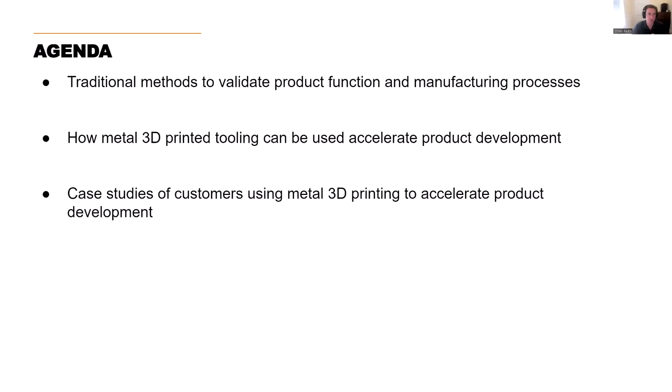So when we talk about product development process, generally we see it in two different ways. In the beginning, certainly during that design stage and some of the very early prototyping stages, it moves very, very quickly. Through modern CAD and simulation and assembly processes, as well as plastic 3D printing, you're able to come up with new designs and actually see those designs in a couple of hours, allowing you to move very quickly through those early design stages and get you to a product that you feel pretty comfortable with, a product that you like, and that maybe you're ready to move on to the next stage of the product development process and actually start to validate not just the design of the part, but the actual function of the part.

That's generally where we see things start to really slow down. When you actually need to validate the function of the component and not just the design that you're able to do in CAD and 3D printing. At this stage, generally, you need these end-use materials. You need the actual material that's going to be used for that part, which generally is not available with plastic 3D printing. And then also you want to start to look at the production representative manufacturing process because, of course, a plastic 3D printed part is going to perform very differently to an injection molded part or a machined component.

We find that this is especially challenging for some of the more highly regulated industries. And when you're using some of these highly engineered resins, like a PEEK or a glass filled material, working in these industries like medical device, auto, aero, food and beverage, et cetera, that require you to do some trials and product validation, this kind of process validation and the validation of the function of your part is especially slow and challenging when those criteria are involved.

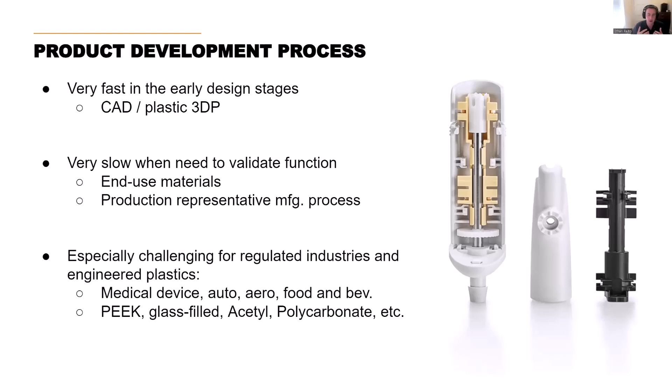So this is kind of another way of looking at what we were just talking about. And then, of course, we'll talk about what this process looks like with metal 3D printing. In the beginning, you're working in CAD, you're moving very fast. You're designing very quickly. You're assembling, you're simulating, you're doing interference detection to make sure that everything's fitting together. In that same day, you could have a plastic part in your hands to make sure that the form and fit is correct. But of course, at this stage, that material representation is pretty terrible.

I've never really found a plastic material that someone has told me is an exact representation of a molded ABS or a molded polycarbonate or some material that you're actually going to go to production with. Those parts are generally not usable for certification if you do need to do any level of certification, and they're doing nothing to validate your actual manufacturing process. So you're learning nothing at that stage about what that part's going to do and how it's going to be made at the end of the process. But of course, you're going to do some cycles in this stage, get to a design that you like. This could take days, weeks, months, years, depending on what the product is.

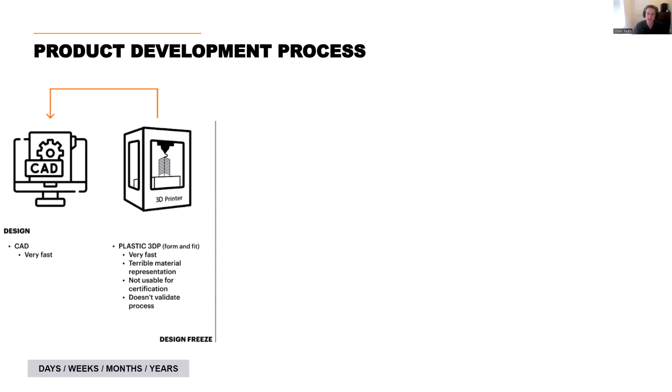But this part of the stage is pretty well developed and works pretty well. After that, of course, now we need to start looking at how we're going to validate the function of the component. You have a couple of different options here that we hear.

You could go with machining. You could machine your plastic part depending on what that application is and what the part looks like. Generally, that can be very fast. You can have a part in a day or two, depending on the lead times of your tools, of your machine shops. It's not going to be a perfect material representation because it wasn't processed in the same way as the final injection molded part was.

We especially hear that being the case with things like glass filled components where you may be cutting fibers with your cutting tools, as well as the flowability of those fibers may be different. So you're not getting a perfect material representation, but much better than plastic 3D printing. Those parts are not going to be usable for certification because they had a different manufacturing process, and you're doing nothing to validate your actual manufacturing process at this stage.

You could do something like a prototype tool, an aluminum tool. It's a bit slower than machining, but you are getting a much better material representation because it was a molding process. Those parts are still generally not usable for certification, depending on the industry, because it was made out of an aluminum tool, and you're not doing much to validate the actual end-use material, end-use manufacturing process. But you are able to validate some of the actual moldability of the part and the function of the part at that stage as well.

We also hear a lot of people using prototype services, something like a Protolabs or a Xometry, to get your molded parts very, very quickly, a week or two, which is great. Again, a better material representation, but generally not usable for certification, and it's not validating your actual end use material process. So this is generally looking at weeks and months.

After you're kind of locked in on your function, you're happy with your part design and the function of the material. Now we need to actually move to validating the manufacturing process and the end use process, and we're moving into our steel tooling stage. Again, this is going to be now very, very slow because we're waiting for steel tools, which generally have much, much longer lead times than something like an aluminum tool or a machined part or a prototyping service.

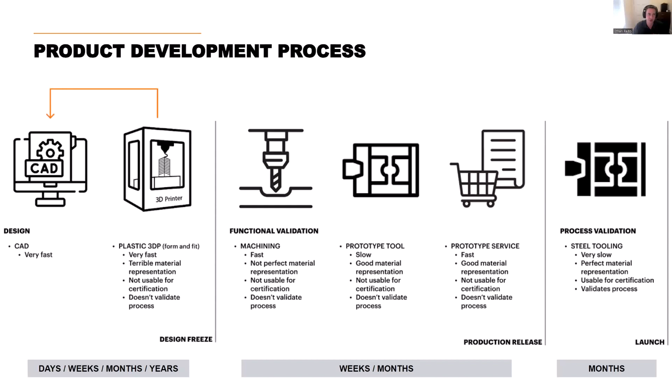But you're going to get that perfect material representation. It's going to be usable for that certification. It's going to be usable for verification, and you're doing a lot to validate the process here because you're using tools that are going to be an exact representation of what you're actually going to end up going to production with. So generally that process is looking like months.

Wouldn't it be great if you could use those steel tools and get all those benefits we just talked about, them being perfect material representations, being usable for certification, allowing you to validate your actual end use manufacturing process far, far earlier, maybe even right after you're doing plastic 3D printing. You'd be able to validate that manufacturing process, validate that the mold is functioning. You're able to actually optimize your molding parameters as well, things like temperatures, pressures, cooling rates, shrink rates.

You're doing some dimensional analysis on your part as well after this process because you're using your end-use tooling material, so you're able to learn a lot more about the dimensions. And then, of course, you're just de-risking all of production at this stage because you're actually using something that's much, much more similar to what you're going to go to volume production with. So wouldn't it be great if everyone just used steel tooling much, much earlier on in the process?

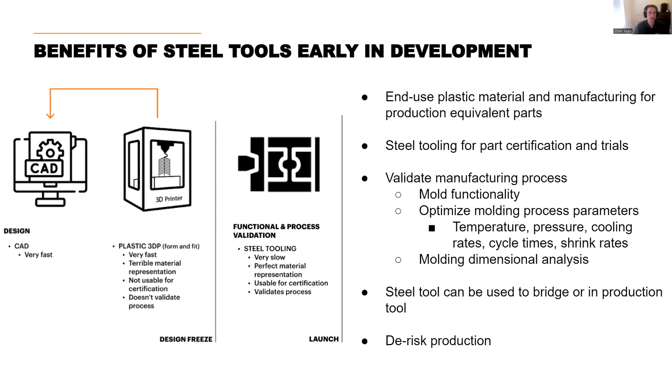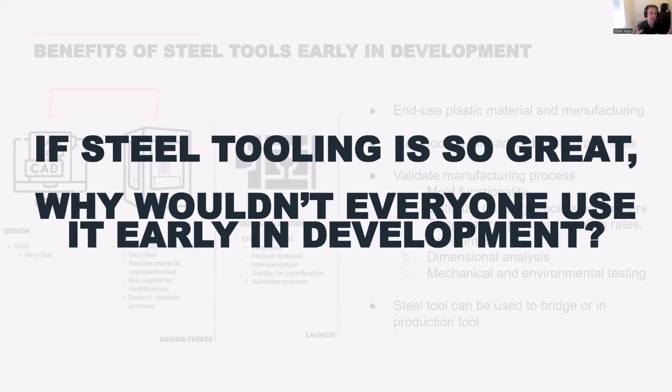But if this is so great, why do people not do this? Why are people not using steel tools immediately after their plastic 3D printing? Why do they do these prototyping services and things like that? Of course, as I'm sure many of you know that have worked with tooling before, there's a lot of challenges associated with steel tooling. Very long lead times. We're always hearing 12 weeks, 6 months, even longer to get steel tools, just because of how difficult they are to process and how specialized the skill set is to do that.

Expensive, tens to hundreds of thousands of dollars to produce these tools, that if you're not exactly honed in on your design and you're not sure that this is the right tool to build, you're not going to want to spend that money to build a tool that's not going to be able to be used for production.

Generally very, very hard to produce in-house when we talk to OEMs. It's not easy to start building steel tools. You need a lot of highly skilled labor. It's going to take years to train tool makers and bring on tool makers. And you need a lot of high CapEx equipment, milling equipment, EDM equipment, grinding equipment to actually start building these tools in-house. So all of these challenges involved have made it relatively rare to use steel tooling during product development unless very, very necessary.

And we'll look at some of those situations where it is necessary and what those lead times look like, especially when you're using those highly engineered resins or you're in one of those highly regulated industries like medical device or something where you need to be using a production representative tool.

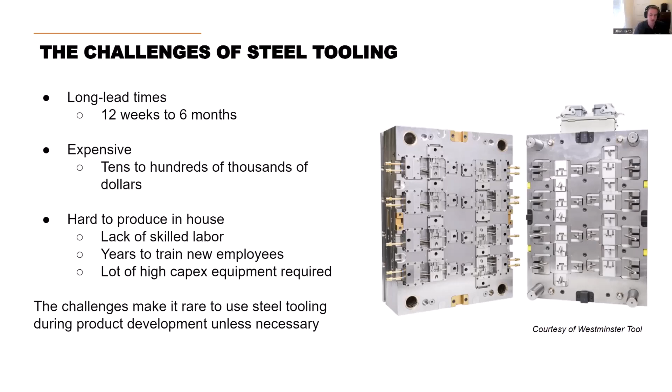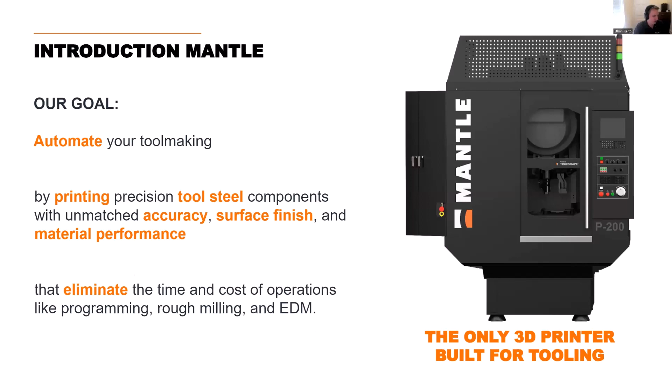This is where I'm going to introduce Mantle. If you're familiar with us, our goal at Mantle is to automate your tool making process. We do that by printing precision tool steel components with unmatched accuracy, surface finish, and material performance that are going to eliminate the time and cost of operations like programming, rough milling, and EDM that are generally required with tool building. We love to say that we are the only 3D printer that's built specifically for tool making. It's the only application we do. All we do all day long is print tools.

So where Mantle fits into this equation is Mantle can produce steel tools in that functional and process validation stage. We can do that at the same or similar speed to what you can do with prototype tooling or some of those prototype services. You're going to get a similar cost to a prototype, so you're not adding a lot of cost, but you're getting that perfect material representation. The parts are usable for certification, and we're able to validate that process as well.

So being able to use steel tools much, much earlier on because you're printing those tools in H13 tool steel or P20 tool steel or 420 stainless steel, which is going to be the same material as your end-use tool, in less time and less cost. So it can allow you to move that entire steel tooling process much earlier into the development stage to actually prototype or develop your part in a steel tool, which leads to a lot of different learnings that we'll explore throughout the rest of this webinar.

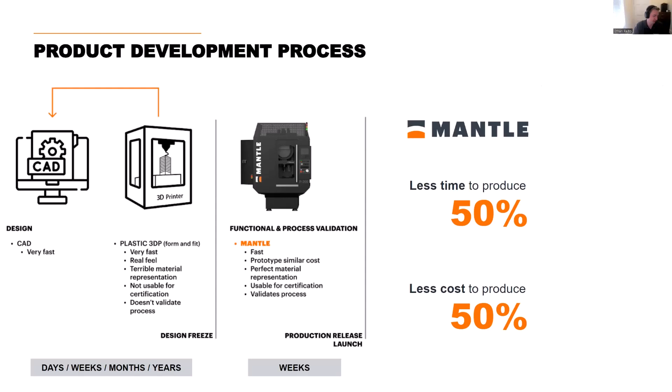Today we have two tool steels available. A P20 material, which we actually call P2X. It's very, very similar to a P20 material. It actually has superior corrosion resistance and comes out of our process with a 32 HRC. And then we have an H13 tool steel, which is actually our more popular material. It comes out of the furnace at a 42 HRC and can be heat treated all the way up into the 50s.

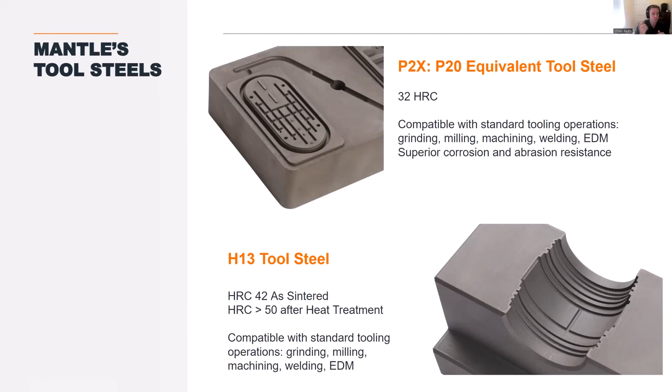Both of these, I should note, are fully compatible with traditional finishing, because we like to say our process gets you anywhere from 50 to 75 to 95% of the way there. Generally, tools need a little bit of grinding or wire EDM for ejector pins and things like that just to touch them up.

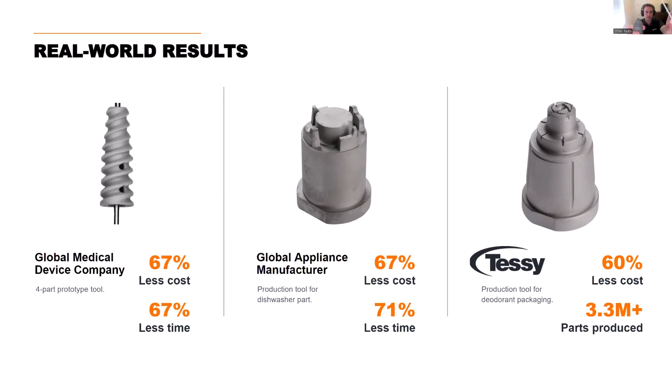Of course, we're going to look at a bunch of different case studies today. These are just a couple of my favorites that we won't go too in depth about today. From a global medical device company, a prototype tool, 67% less cost, 67% less time. A global appliance manufacturer, a dishwasher component, 67% less cost, 71% less time. And our favorite durability case study is from Tessy Plastics, 60% less cost and over 3.3 million cycles on these deodorant components.

The first case study we're going to look at of a company that's using metal 3D printing to help them accelerate product development is this prototype tool for this large medical device OEM, which unfortunately we can't disclose, but we can talk about this application that they're doing with their printer.

They had a new product they were bringing to market that they needed to mold some parts in acetal and Radel. Both of those materials would require them to use steel tooling. So very, very early on, they acknowledged, okay, when we want to go validate the function of these components and we want to actually validate our process here as well, we're going to need steel tools, which of course leads to a lot of cost and a lot of lead time. So they're always looking for a better way to do that.

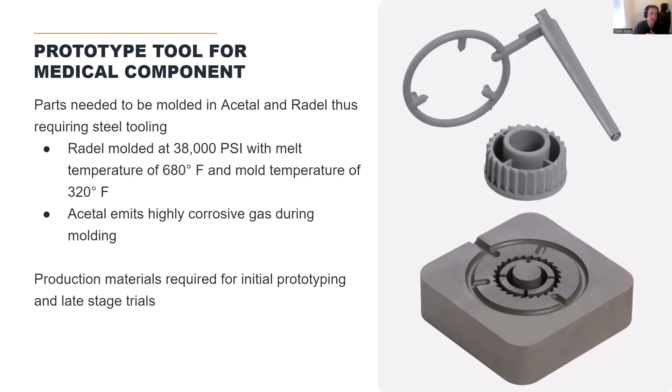They were told the Radel was molding at 38,000 psi with high melt temperatures and mold temperatures, and then the acetal was emitting some corrosion gas, which made aluminum tooling not an option here for this prototyping stage. They also wanted to use production materials for their tooling because this was going to allow them to get through both initial prototyping and some of the late stage trials that were going to need to happen because they were using a production representative or production equivalent tool early in the prototyping stage. They're able to use those same parts, which they wouldn't have been able to do if they had machined those parts or if they had used an aluminum prototype.

What they did is they used their Mantle system, printed these tools in actually our P2X material, which is our P20 equivalent material, 62 hours of printing, 36 hours of sintering here. There was 24 hours of finishing time required. They had to add the ejector pins, which they did via wire EDM. They tapped the mounting holes to mount this thing actually into the mold base, and then they ground it a little bit as well to fit it into the mold base.

So all in all, they were able to produce a P20 tool steel mold in just 8 calendar days, which is pretty incredible when you think about it. It's not uncommon to wait 8 calendar days to get your parts from Protolabs or a machine shop or from an aluminum tool, but we're getting a tool steel mold in just 8 calendar days. It was 122 hours of total fabrication, but important to know, only 24 of those hours was actually active hours. The printing and the sintering, of course, is just set it and forget it. That's going to run over the weekend. It's going to run while you're in meetings, whenever you want. So 24 hours of active finishing here.

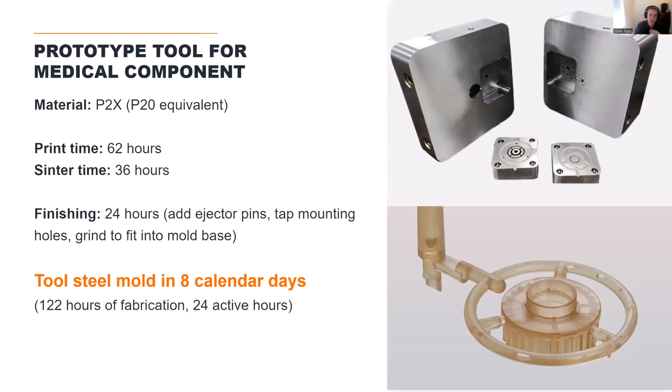Some of the key metrics for this company: they were able to reduce the lead time here from 7 weeks down to 8 days. They said they would have had to outsource this tooling, it would have taken them 7 weeks to produce that, but now they're able to do it in-house in just 8 days. The amount of active work from tool making went from 148 hours down to just 24 hours. So obviously you can already see how this is clearly accelerating their product development to be able to get functional end-use parts in just 8 days out of a tool steel tool.

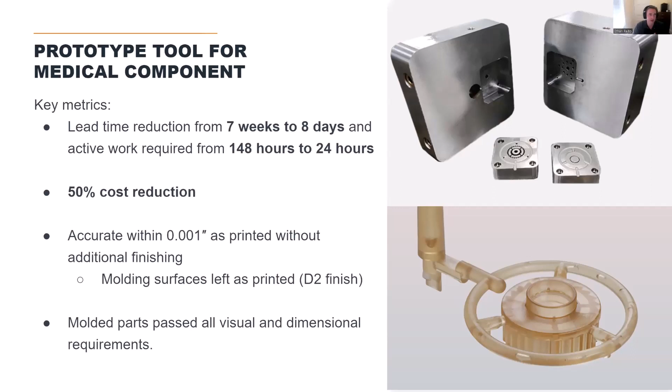They also saw a 50% reduced cost compared to outsourcing this tool, and the entire tool was accurate within a thou without any additional finishing. The molding surfaces, this is important to know, the molding surfaces here were left as printed. Our tools generally see a D2 surface finish similar to a sinker EDM process. So for this application, that matte surface finish was totally fine. So they're able to leave that all as printed, and the molded parts passed all visual and dimensional inspections, which was great. They molded a couple hundred parts here, which was awesome.

How do they actually remove all this tool making time and all this tool making cost? By removing a lot of the active work involved. As you can see on that top, if you're familiar with tool making, a lot of different steps are involved in building this part, from the actual CAM work, the rough milling, the wire EDM, the electrode milling design and production is always a very, very time consuming step. And then of course, all the EDM work that would have been involved to sinker out these deep features. They estimated that was going to take 148 hours of their toolmaker time. With Mantle, they simply printed it, did their wire EDM, did a little bit of final finishing, and got down to just 24 hours.

But really, the big difference here is in the calendar time, from 7 weeks of calendar time down to just 8 days of calendar time, which allowed them to dramatically accelerate their time to market because they have end-use parts that they're moving into. They're giving them to their engineers for prototyping. They're using it for trials, and they're able to get those end-use parts very, very quickly. What's even greater now is that they can use these tools to run thousands, tens of thousands, hundreds of thousands of parts because they are a tool steel tool that they can use in production.

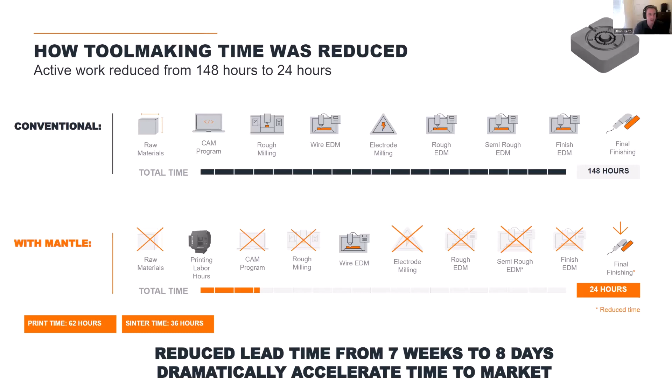Another great example is from Hypertherm here. You can see this is actually, I have the part here with me today. This is used as a shield cap for their plasma cutter. Hypertherm makes a variety of different torch components, plasma cutters, water cutters, all sorts of these different components. So this was a new shield design that they were testing. It's part of an assembly, obviously. This is sort of the cap that helps protect the torch, I believe.

This is actually made out of a 30% glass-filled PEEK. This thing is incredibly stiff, as you can imagine what 30% glass-filled PEEK feels like. So it has a high melt temperature as well as a high mold temperature. So right away they knew using an aluminum tool is not going to be an option here. Since it's a glass-filled material, we're not going to be able to machine it because the properties are going to be quite different, so they knew from the start we're going to need to use a tool steel tool during our development and prototyping stage here.

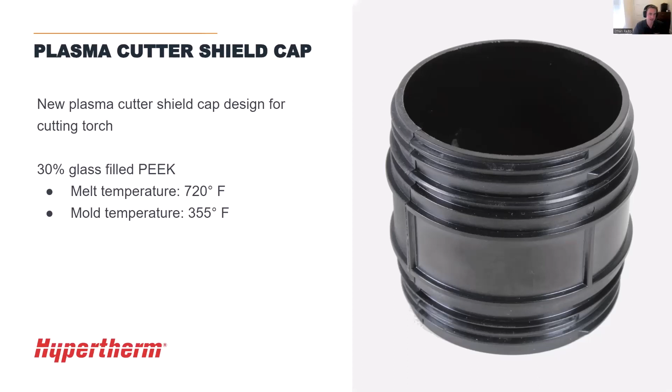What happened? They worked with Mantle here. This is actually a slide component that we can print. This is a relatively big part, I would say, for us, but you can see this is a slide that was used to, you can see here, obviously it doesn't fit perfectly because the part shrinks after it comes out, but the slide for making the outside of this component was printed in our H13 tool steel, which gave it that hardness needed for the glass-filled material, as well as that high temperature cycling that you were going to see during this molding process.

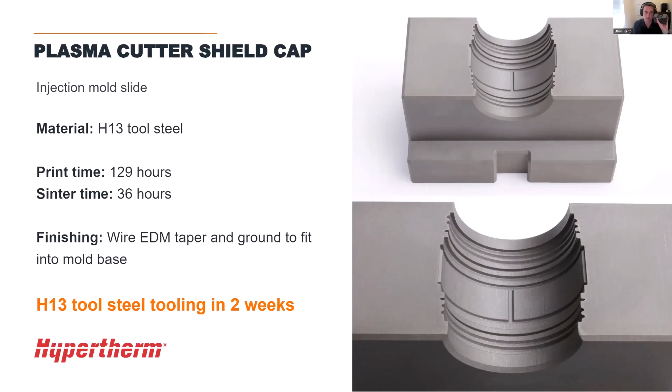This part was printed in 129 hours, so about 5 days here, sintered for 36 hours. After it was done through the sintering process, they had to do some wire EDM for a taper that's on the side of this, as well as they ground it to fit it into the mold base. But after all that was done, they had H13 tool steel tooling in just 2 weeks, which of course is, if you're familiar with tool steel tooling, a very, very fast process to get them the slide in just 2 weeks here.

What are some of the key metrics here? They saw a 75% lead time reduction on this tool compared to outsourcing it. Again, they would have had to outsource this tool to be purchased. This is pretty heavy. I'm going to put it down. I'm getting tired. But a 75% lead time reduction compared to outsourcing it. 75% cost reduction as well by producing this with Mantle's technology.

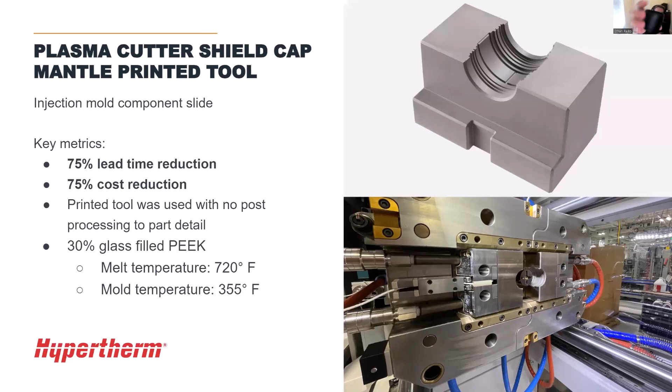Again, the printed part detail was used with no additional finishing. They used all of this part detail as printed, and then they molded this 30% glass-filled PEEK at that high melt temperature and high mold temperature as well. And the parts came out and met their expectations. It's a nice part here. And then you can see, actually, the molding process here, molding those housings. Awesome.

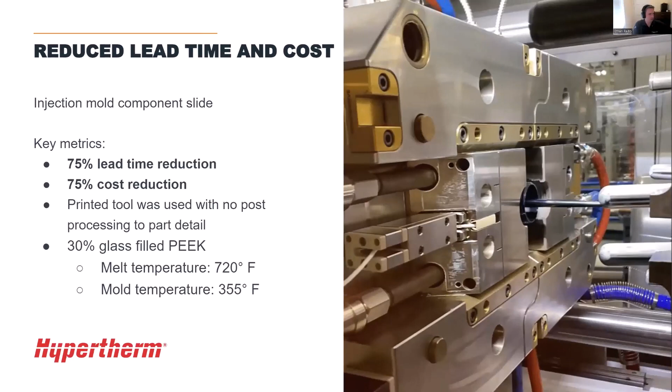So how was Hypertherm able to reduce the tool making time here? With the conventional process, they were looking at an 8-week process because of all the different processes that were involved. A lot of EDM work would have been involved to produce these fine features for these different thread components that are on the outside of this part. With Mantle, they were able to remove all the EDM work except for the one taper wire EDM step and just print all those features in. Being able to leave them as printed was awesome for them because they were able to take the most time-consuming process and remove it.

So for them, 8-week lead time down to 2 weeks, so they're saving 6 weeks of development time here, able to test and validate the part much, much faster. And of course, since it is an H13 tool, they can use this to run as many as they want. They can move to production with this.

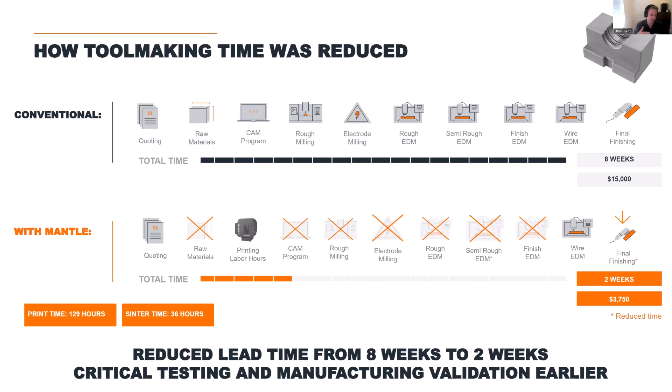While they wait for a high cavity tool or something like that, they can bridge, or they can just go to volume with a tool like this. So 8 weeks to 2 weeks, critical testing and manufacturing validation much, much earlier on, and they're validating the process in the same time. They're going to be able to know that this PEEK is molding to their properties. They're able to look at the temperatures, pressures, shrink rates, and dial all that in during this prototyping stage and not have to worry about that when they get to production, which can commonly slow down actual production manufacturing.

Another great example here is this slam latch from our customer Nicolet Plastics. Nicolet Plastics is an injection molder in Wisconsin, so a little bit different. They're not an OEM. We looked at 2 different OEM examples, but we actually see plastic processors using Mantle's technology to help their customers accelerate product development and get involved with their customers earlier on in the development stage.

This component here is an actual slam latch. It's used for docking laptops and iPads in emergency vehicles. If you've ever seen, driving by a police officer and they have their laptop kind of docked on their dashboard, this is one of the components inside of that docking station to allow that to happen.

For their customer, Gamber Johnson, being first to market is critically important in this accessory market, because whoever is the first to market generally captures most of the market share. When a new iPad model comes out or a new laptop model comes out, there needs to be a new accessory to mount that to the dashboard, and being that first accessory on the market is critically important to them. So they're looking for the fastest way to get these products to market.

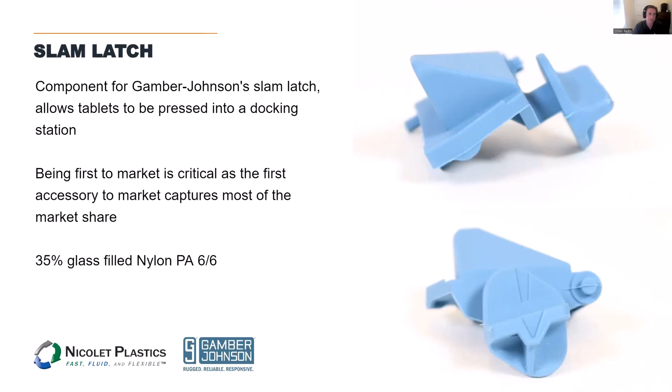This again was molded out of a 35% glass filled nylon, so a relatively abrasive material. They would not have wanted to mold this with aluminum in the prototyping stage, and they would not have wanted to machine it because they would have been cutting those fibers and they would have seen different part properties. What did they do? They actually printed 3 different inserts here.

I really like this tool because it's a really good representation of what Mantle's best at, which is eliminating sinker EDM work. As you can see, all these different features on this part here would have required pretty extensive sinker EDM work, because there's a lot of deep, thin ribs that would have required a lot of different electrode burning here. Of course, with Mantle, we're able to just print all those features in.

They printed 3 different inserts here, actually, the core, the cavity, and there's another insert that goes inside of this hole here that's used for the venting process. They had to insert this as well, but they printed all 3 of those in about 150 hours, so about 7 days here. All 3 of them went in the furnace at the same time for about 36 hours. They only needed to do about 10 hours of finishing work here.

They did some wire EDM just on those ejector pins. You can see we're able to print those ejector starting holes in. I don't know how well it comes across on my camera, but there's some really small holes in here. You print in a starter hole, then they just wire them out just because of how precise those need to be. And then they did a little bit of grinding to fit this into the mold base.

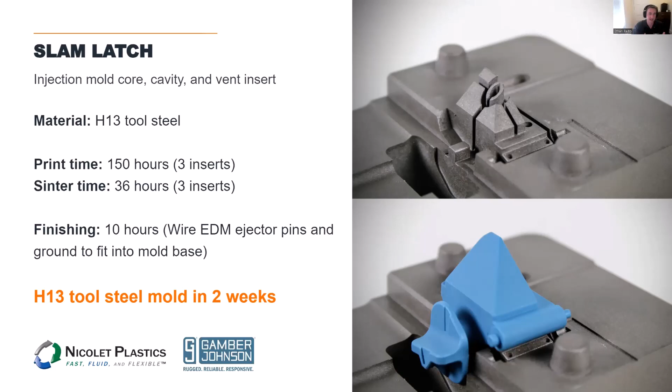So the result was an H13 tool steel mold for them in just 2 weeks, and they're able to produce that internally. Nicolet really likes to say that they're able to produce production tooling at prototype timing. They can offer to their customer a 2-week H13 tool, which is really something that most of their competitors are not able to do, and allows them to win a lot of this business, like from Gamber Johnson.

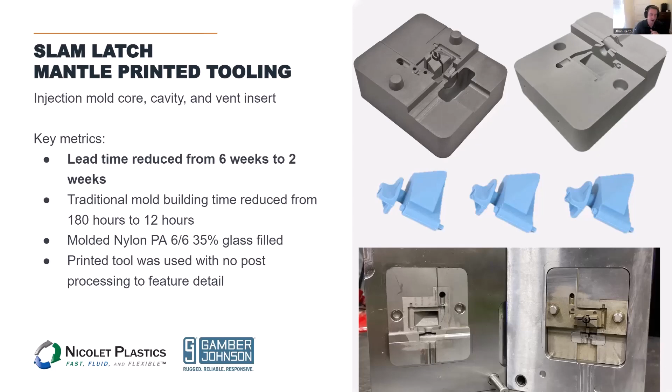So some of the key results here: lead time reduced from 6 weeks down to 2 weeks. The traditional mold building time reduced from 180 hours, they estimated, because of all the sinker EDM work that was required, down to just 12 hours. Molded this 35% glass filled nylon, and the printed tool was used with no post-processing to that feature detail that you're seeing up there, which is really, really important. They were fine with that matte finish that you see on this part, and that was totally fine for this actual process.

So again, these charts are probably starting to all look pretty similar. We're removing all those time-consuming and expensive steps of the tool building process. We're removing all that EDM work. We're just printing, doing a little bit of final finishing, allowing them to go from a 6-week lead time down to just 2 weeks, allowing their customer to get to market much, much faster, which is really, really important for them. And it's a new service they can actually offer to their OEM customers to allow them to offer this production tooling and prototype timing.

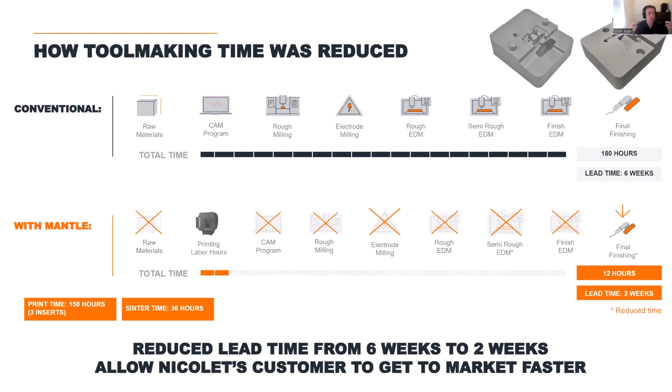They were able to go in just 9 days from the design to the completion of the tool. They did use some conformal cooling here to help them remove some heat blushing they were seeing on the plastic, and then lengthen that tool life to last well over 10,000 shots for different prototype bottles they were building. The part required some pretty minimal machining. They ground the top and the bottom just to make sure it was perfectly flush with the rest of the tool. And then they did some hard milling to the OD base and O-ring just to ensure there was no leaking or anything like that.

So 9 days for design to completion for an H13 tool steel blow mold, pretty fast process, of course, and they're able to run tens of thousands of shots with this with really no challenge, as well as alleviate some of the challenges they were having with heat blushing on the prototype tooling materials. So this is always another great example that we like to showcase.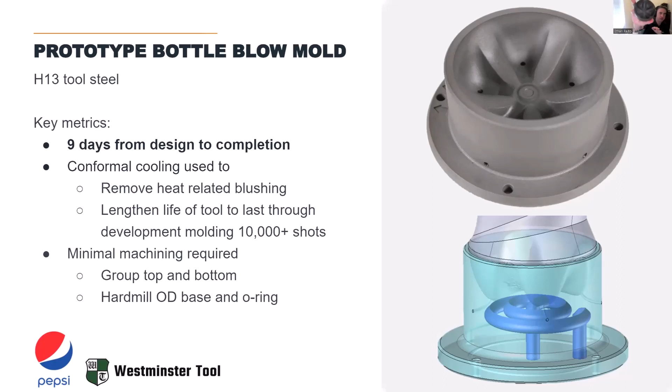Awesome. I'll go ahead and just wrap up quickly some of the benefits of using steel tooling early in development. Of course, steel tooling is very, very difficult to produce, so it's not common to be used early in development. But with metal 3D printing and Mantle's technology, people are starting to use it much, much earlier on, which is paying a lot of dividends.

From the very, very beginning, you're using your end-use plastic material, your end-use resin, your PEEK, your nylons, your glass-filled materials early on in the process, as well as using your end-use manufacturing process to produce true production equivalent parts, which helps you de-risk the entire product development process because you're getting a part that is identical to what you're going to go to volume with, and you're also using a manufacturing process that you're testing out and ensuring is proper before moving to volume production.

You can use those steel tools for your part certification and trials. You're validating that manufacturing process, both the functionality of the mold, which is very, very important to make sure the mold's functioning and you're getting the parts you want, as well as to optimize those molding process parameters, things like temperatures, pressures, cooling rates, flow rates, cycle times, and shrink rates, as well as doing that molding dimensional analysis to ensure these parts are coming out of your tool with the properties and the tolerances that you want.

Of course, an added benefit here is these steel tools can then be used to bridge or actually in volume production. So maybe you need to go buy a 16 or 64 cavity tool while you're waiting your 12 or 16 months to get that tool back from wherever you purchased it from. You can run a million shots on your H13 tool and bridge into production there. And ultimately, you're really just de-risking your entire production process here.